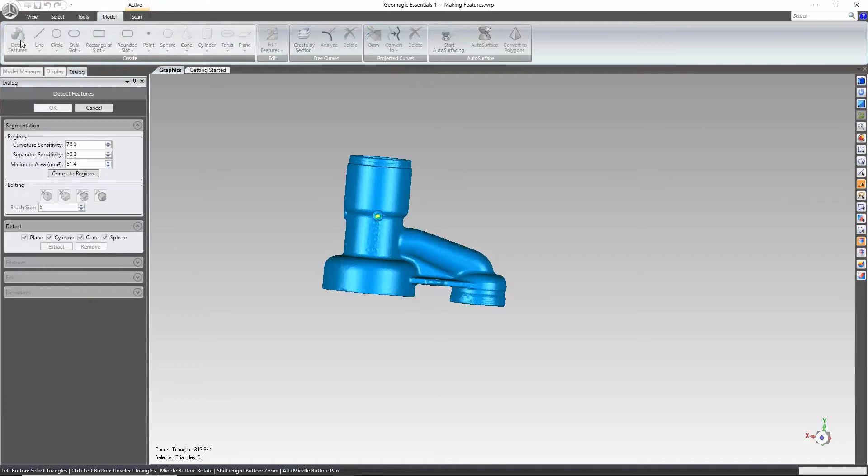First, we'll take a look at the automatic detection method. I can use the Detect Features button inside the Model tab. From here, I'll first need to compute regions, which will separate my part into different shapes based on the curvature. I'll click the Compute Regions option.

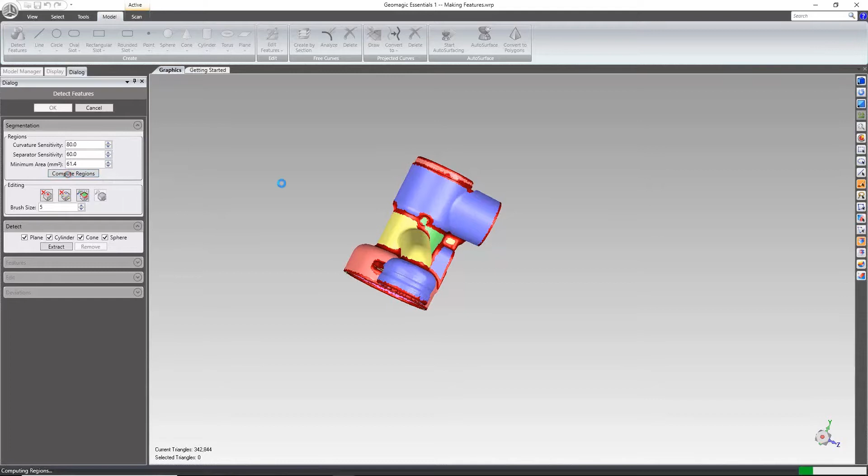I can see the regions seem to encompass many different shapes. I'll go ahead and increase the curvature sensitivity of these regions. Once I turn the sensitivity a little bit higher, I can see my regions look much more accurate. If I wanted, I could keep trying to increase this number.

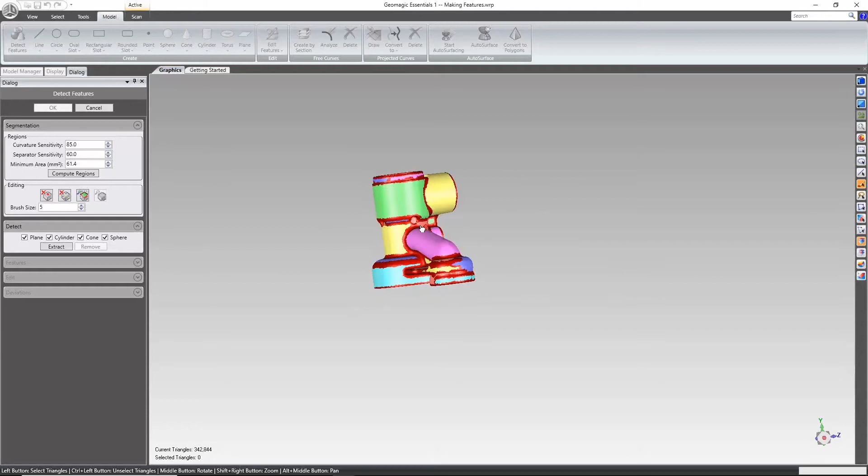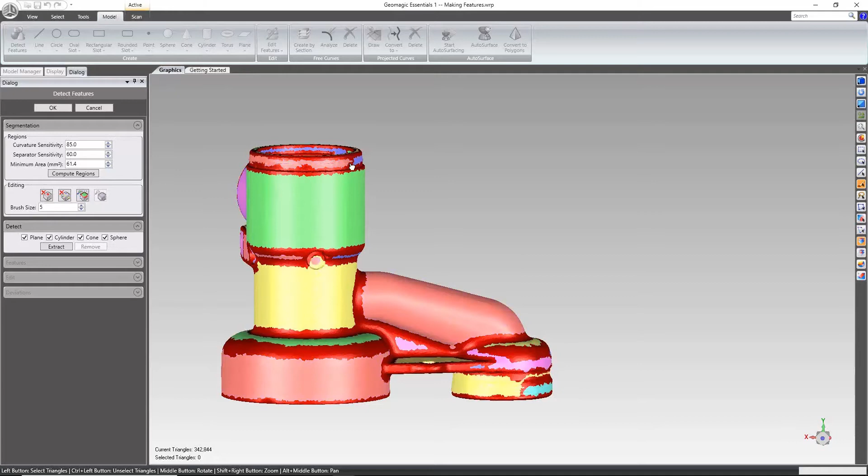Another option I have is to manually edit these regions. Using my paintbrush, if I hold Control, I can remove a separator. If I click without holding any buttons, I'll add a separator to make more regions. So now I've made a bigger cylinder here. Other options, if I wanted to combine all of these into one region, again hold Control, just draw my line, make one region.

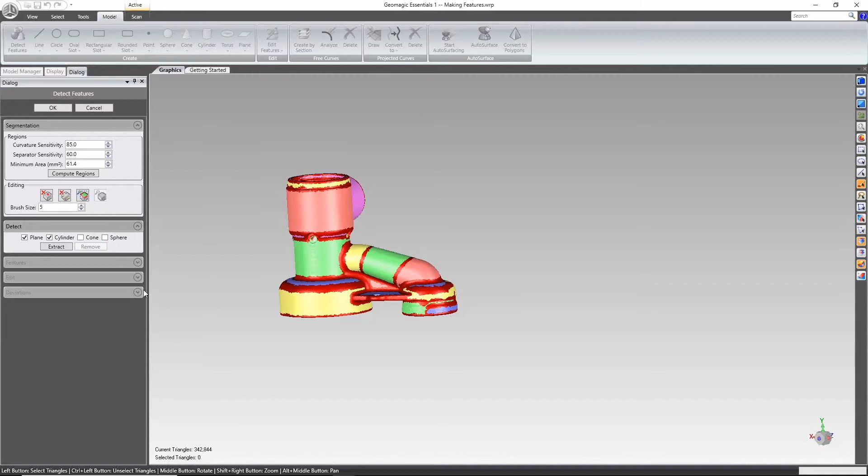Once I've made all the edits I think I want, I'll go ahead and come back over to my Detect Features. Here I can choose to make a plane, cylinder, cone, and sphere feature. Just for this example, we will make planes and cylinders to show these shapes. Once I click the Extract button, only on the regions that are reading as a cylindrical or planar shape, I can see it made lots of planes, lots of cylinders.

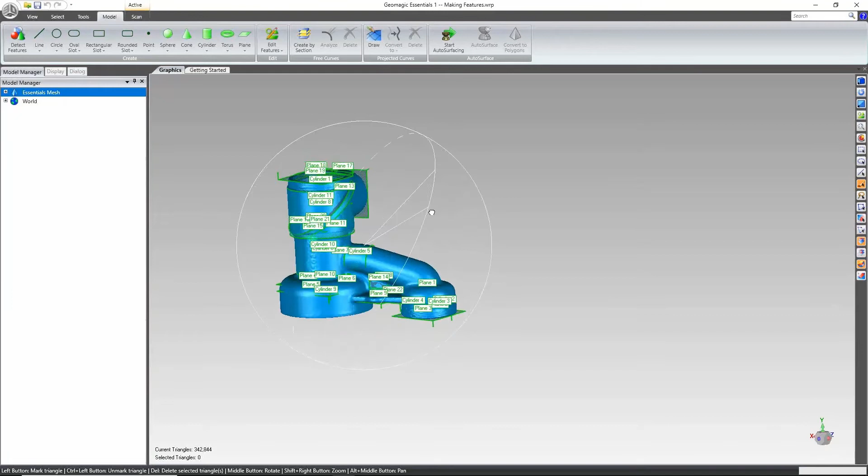Some of these might be useful, some of them might not be. I'll go ahead and still accept that command. And the other option we'd have would be to make these manually. In my Model Manager, hide all those features.

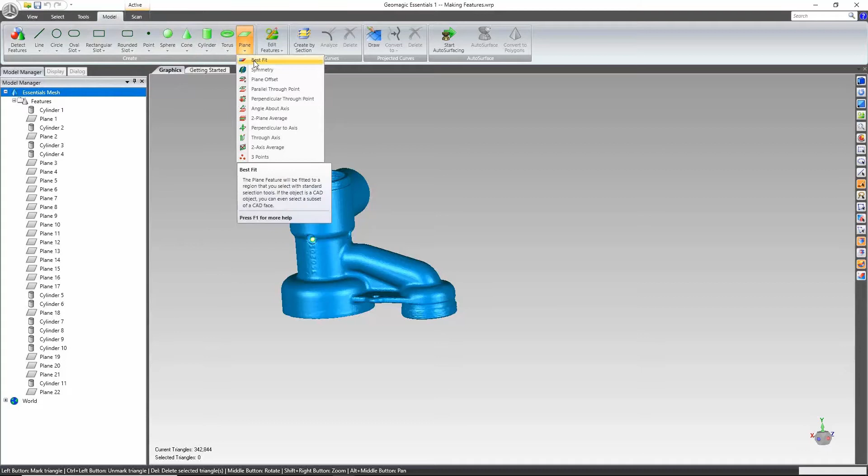Back up in my Model tab, I can see all the different features I can create manually. So first, commonly, I'll make a plane. You can see again we have lots of methods to make a plane. I will just use the best fit method.

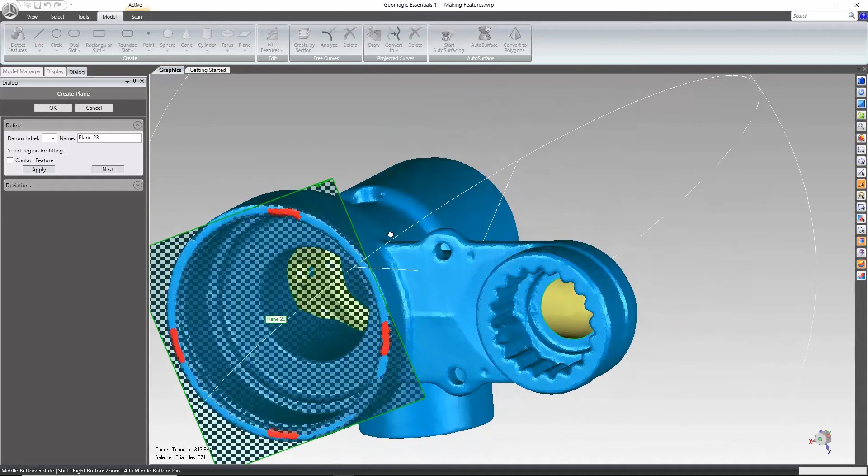If I want to make a plane, let's say on the bottom of the part, I'll come select the data I want to use, apply the plane, click Next. Now I can make a second plane.

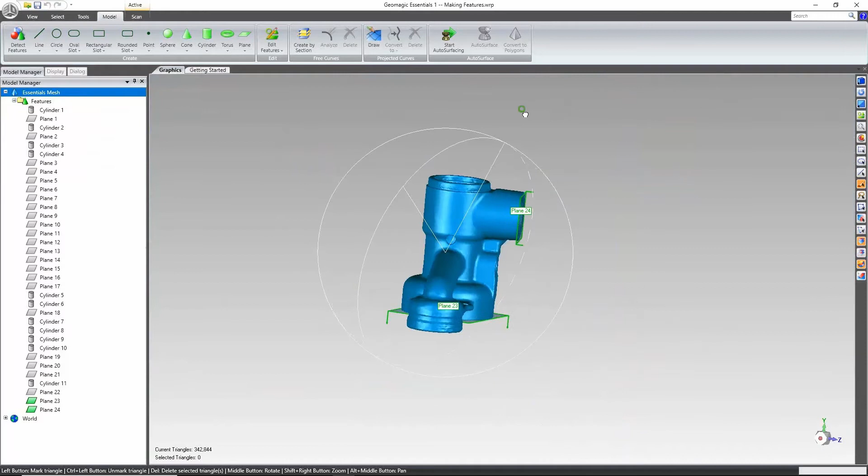Those are the basic planes. Now I can make a symmetry plane. This would find a part that's symmetrical, or at least close to symmetrical, and find that plane of symmetry.

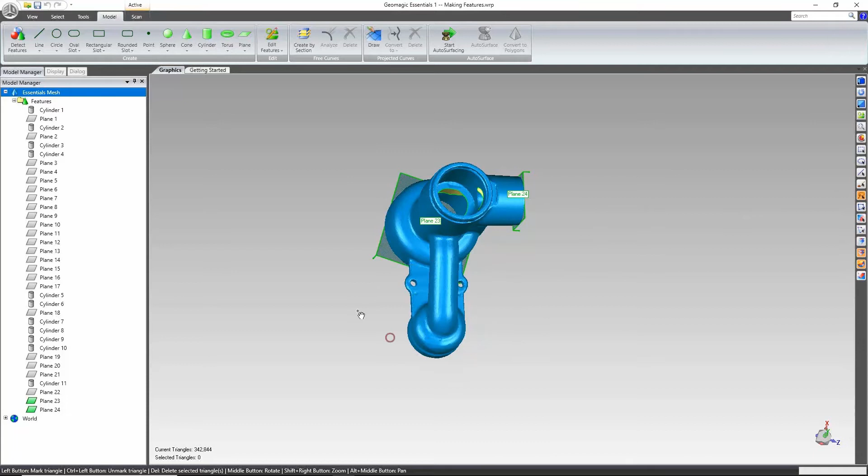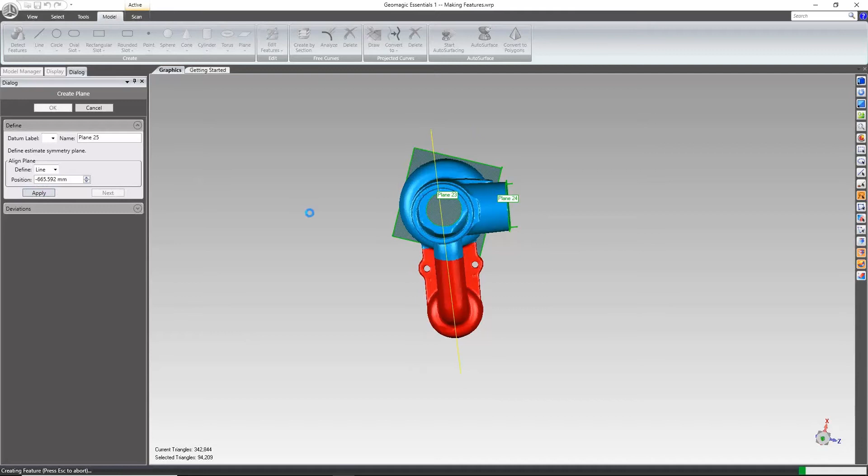So the first thing I'm going to do is come change my selection type and select a part of the scan that I know is actually symmetrical. So when I come back to my plane symmetry option, first it wants me to define an estimate plane. I can draw this as a line where I think this plane would approximately go. Apply. And I can see the plane, it's been altered slightly to be more accurate to the scan data.

There are many other plane options we can use, and there's also many others. Now for creating a cylinder, we just have the best fit option.

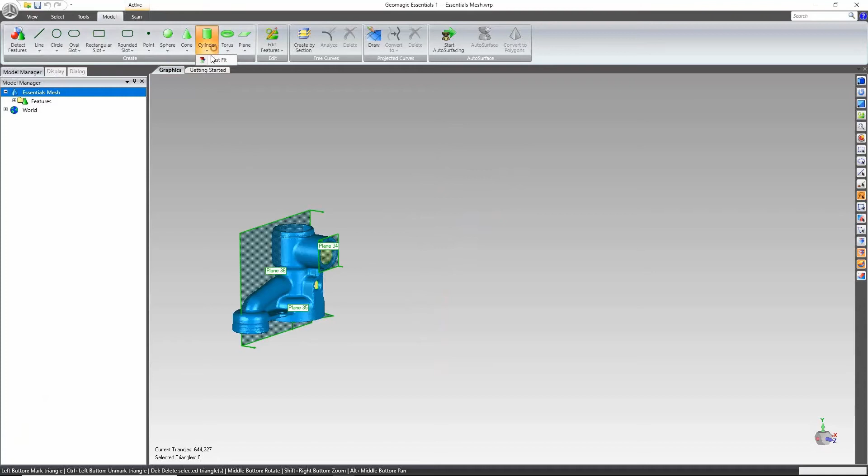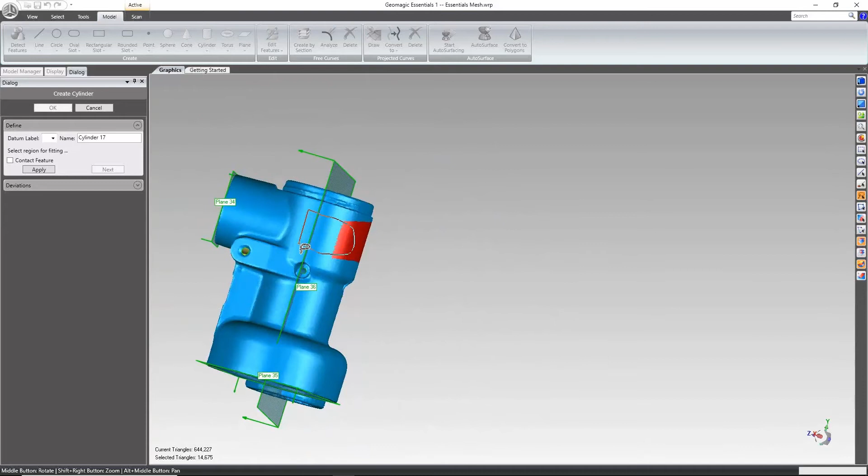So for that, I'll come in and paint everywhere that I want to be a cylinder. Turn my through-all off. And if I want to do this, from there I can apply. I can see the cylinder fit to my part.

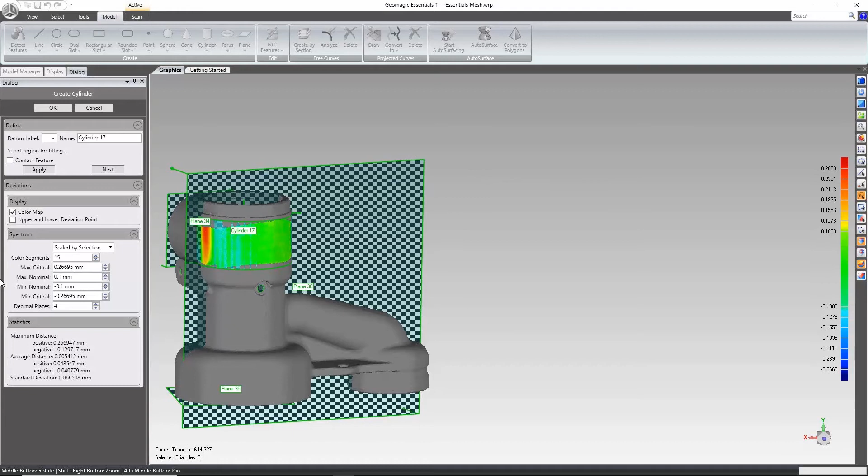If I want, I can even turn the deviations on to see how close this actually is to my cylinder. Make sure I selected the correct data. If I change a tolerance, it looks like my cylinder's pretty accurate, maybe on the edges not.

If I wanted to change some selection, I could just by coming back into create cylinder. You add a little more data and apply.

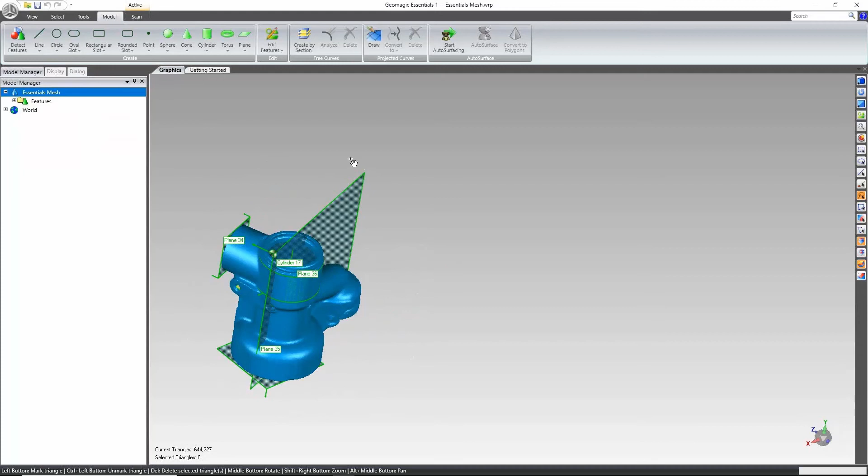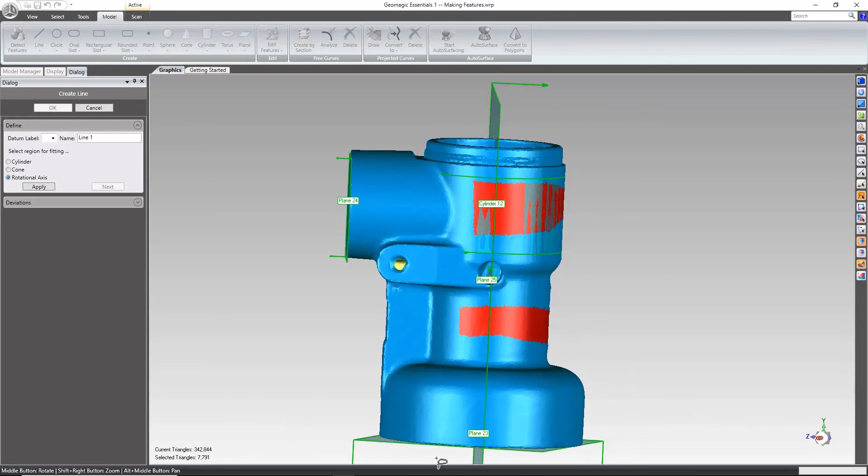Another option would actually be to use the line tool, and you can find a cylinder, cone, or rotational axis. Using this method would allow me to select all the data belonging to a single rotational axis, to find a more accurate line going through the entire part.

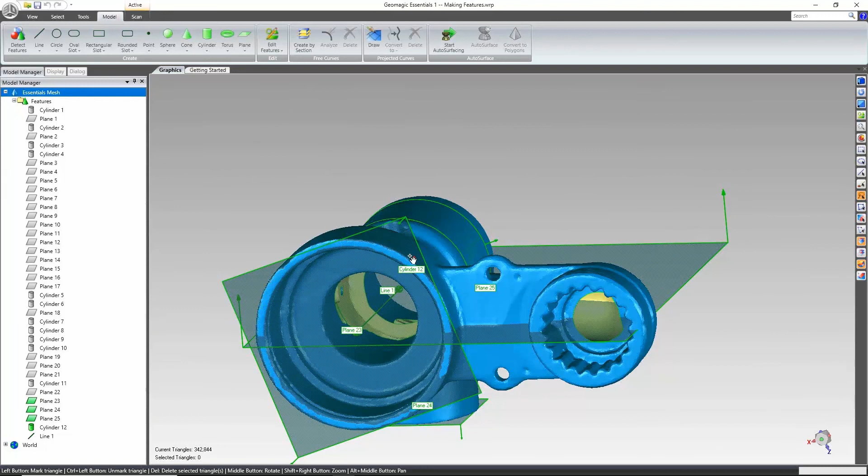There are many other features to make. Most of these have a best fit method. For now, that will end our lesson on how to create features in Geomagic Essentials using an automatic and a manual method.